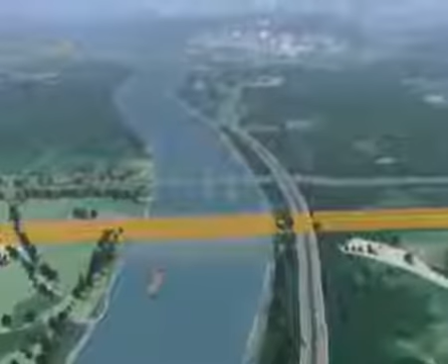For alluvial soils as well as for rocky conditions, HDD is the right method to install a prefabricated pipeline fast and cost-effective underneath obstacles.

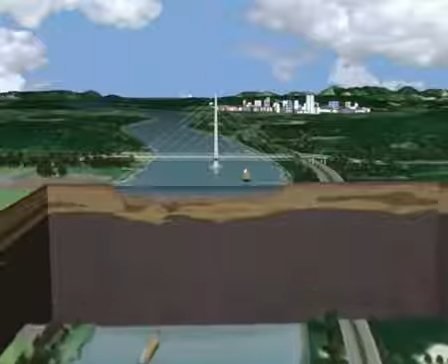The principal working method is easy to explain. From an entry point on one side of the crossing, a steerable drill bit is pushed through the ground to the exit point on the other side of the obstacle. The pilot bore is then enlarged in one or more reaming passes until the borehole reaches the desired diameter. In the final step, the prepared product pipe is pulled by the drill rig into the bentonite-filled hole and placed safely in the ground.

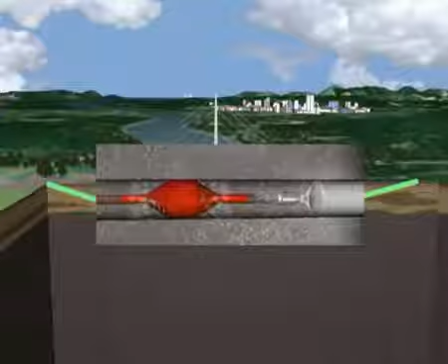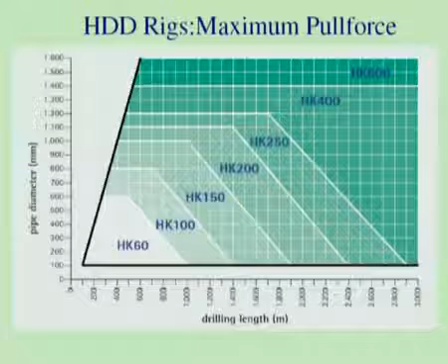The diagram shows the pipe diameter and lengths that can be pulled by the most popular rig sizes in suitable ground conditions. Four basic types of drill rigs are available: frame rig Series F, trailer rig Series T, crawler rig Series C, and modular rig Series M.

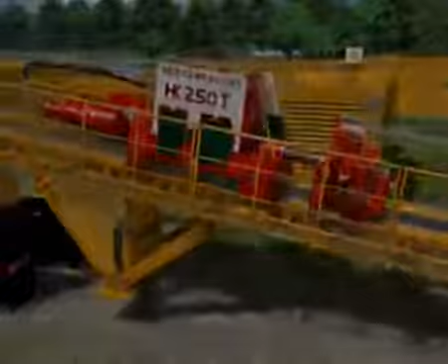The following computer animation shows the use of a 250-ton Herrenknecht trailer rig for a pipeline river crossing. The soil conditions in the example consist of typical alluvial soil as clay and sand.

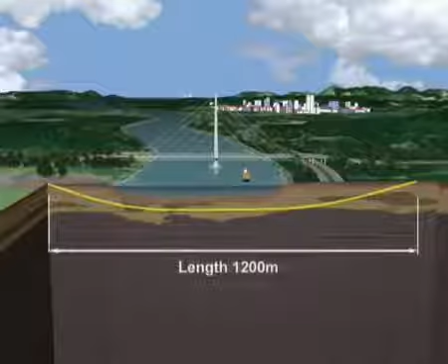The drilling alignment is shown schematically. The length is approximately 1,200 meters, with an entry angle of 14 degrees at the rig site and an exit angle of 10 degrees at the pipe site.

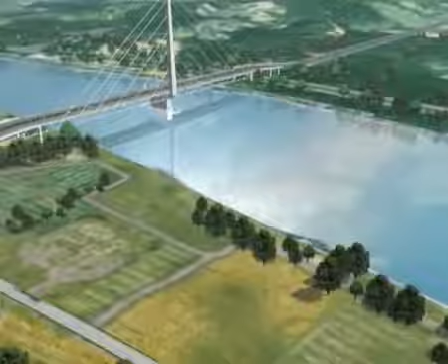On both sides of the river, a limited working area is prepared for the drilling equipment and the pipe works. On the rig site, a small entry pit with a depth of approximately 2 meters is installed. Nearby, a larger storage pit for the drilling suspension is constructed.

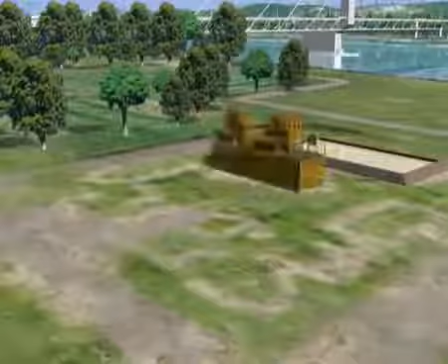Separation plants, a buffer tank, a mixing unit for bentonite, pump and power packs, and pipe skid complete the basic equipment on the rig site.

All equipment is delivered in standard containers and can be installed fast and easily. The control cabin is placed near the sheet pile wall, which is required to anchor the drill rig.

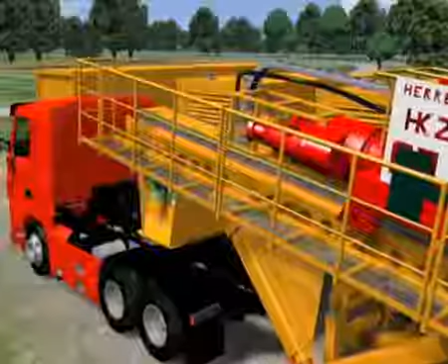For easy transport over long distances, trailer rigs are the ideal layout design. Herrenknecht's trailer-mounted drill rigs can be towed by any kind of truck with a standard kingpin and sufficient payload. The drill rig is lifted off the truck with crank-handle joist supports without needing additional hydraulic power. Then the truck can leave the site.

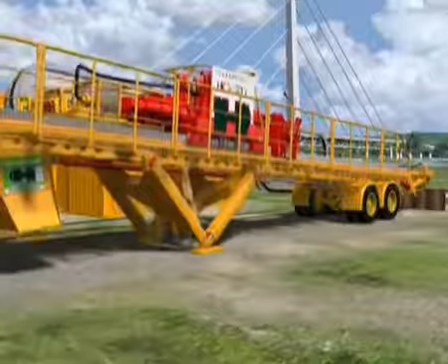With the hydraulic power supply from the power packs, the front supports are then extended and the axle unit is moved into its park position.

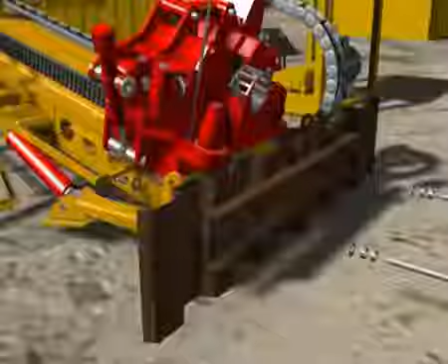The carriage and the breakout unit can then be moved into operational position. Both units are connected via a power chain to the hydraulic, electric and drilling fluid supply. Finally, the rig is anchored to the sheet pile wall and drilling operation can start.

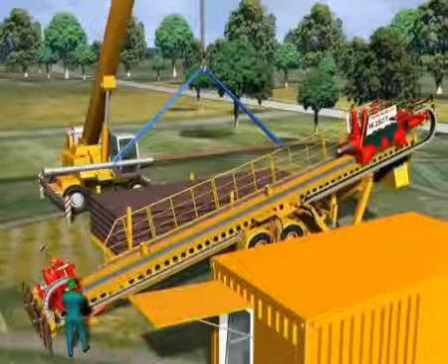The first pipe with the drill bit is positioned by the crane and connected with the carriage. Then it is pushed forward into the entry pit while rotating constantly.

One after another, the pipes are connected and pushed into the ground. The pipes have conical threads for easy make-up and break of connections.

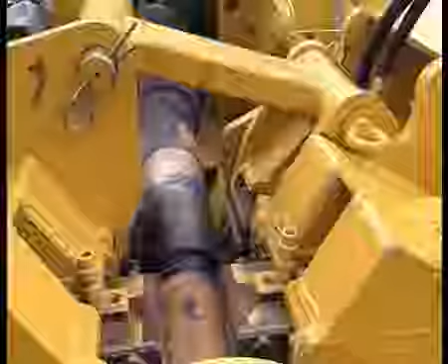If drilling straight, the drill bit rotates constantly at high revolution. The bentonite suspension is pumped through the drill string to the nozzles in the front of the drill bit, hydraulically cutting the soil in front.

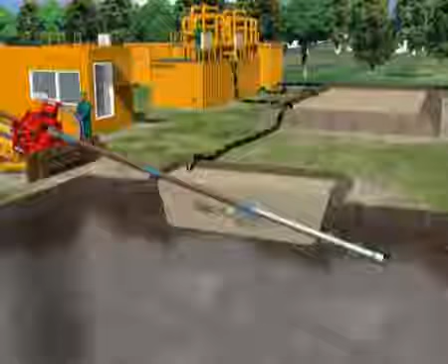There, the drilling mud mixes with the soil and flows back through the annulus between the drill pipe and borehole to the entry pit on the surface.

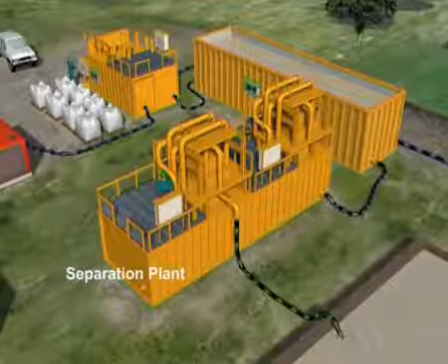From here, the bentonite cutting mixture is pumped to the separation plant. This unit separates the cuttings from the slurry, and the cleaned fluid is transferred to a buffer tank. Fresh water from the river is mixed with bentonite and added to the mud cycle.

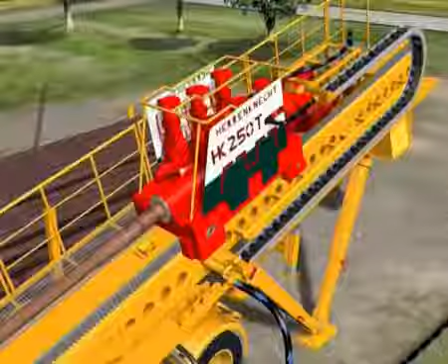Now the high-pressure pump takes over, pumping drilling fluid along the surface hoses to the carriage, down through the drill rods and back to the drill bit in the ground.

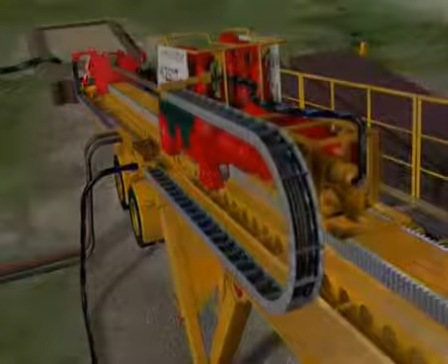Installed behind the drill bit is a so-called bent sub with approximately 1 to 2 degrees deflection. When the rotation of the drill string stops, the bent sub faces in a certain direction, adjustable from 0 to 360 degrees. If pushed further, the drill bit will follow this direction and create a curved alignment in the ground as per the project design.

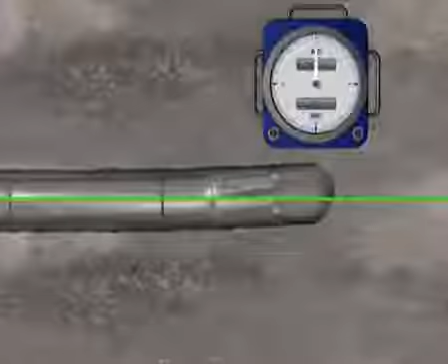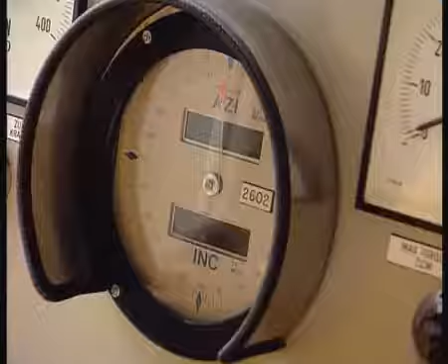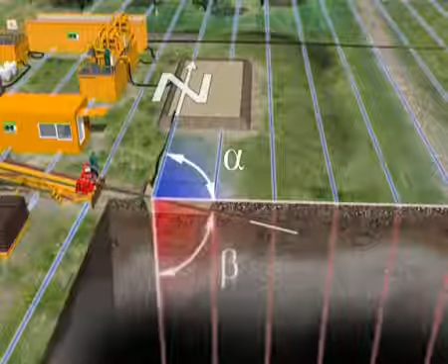The inclinometer in the driller's console shows the working direction of the drill bit in the ground, the so-called tool face. This information, together with the actual azimuth and inclination, is generated by a steering tool placed within the first drill rod, located directly behind the drill bit. The references for this information are the Earth's magnetic field for azimuth and the Earth's gravitational field for inclination. Together with the drilled length, a computer system can calculate the actual position of the drill bit in the ground, enabling the driller to carry out necessary corrections of the alignment by adjusting the tool face of the drill bit prior to further advancement.

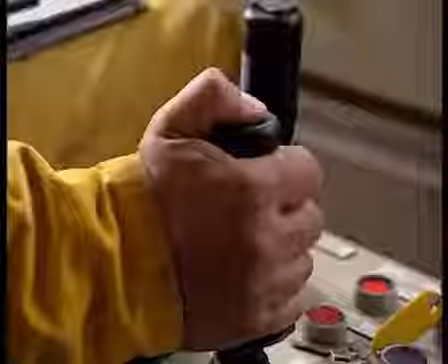The driller as well as the surveyor are located inside the air-conditioned control cabin. The large windows allow an excellent overview of the drill rig and job site.

When the drill bit punches out on the other side of the obstacle at its predetermined position, the pilot hole is completed and the drill bit, as well as the anti-magnetic drill pipe with the steering tool, is disconnected from the drill string. A small exit pit and a suitable storage pit for drilling mud, including a recycling unit, is installed on the pipe site working area in order to process the returning drilling fluid on this side of the obstacle.

In order to enlarge the pilot hole to a larger diameter, a reamer is connected with the drill string and then pulled back through the borehole by the drill rig. Depending on the soil conditions, different types of reamers, like barrel reamers, fly cutters and hole openers, are available to achieve optimum drilling progress. All reamers are equipped with nozzles and cutting tools in order to attack the ground both hydraulically and mechanically. Depending on the desired final diameter of the borehole, several reaming passes can be necessary.

During the reaming process, the drilling fluid with the cuttings returns to both sides of the crossing.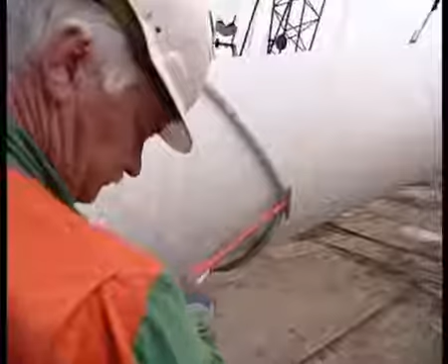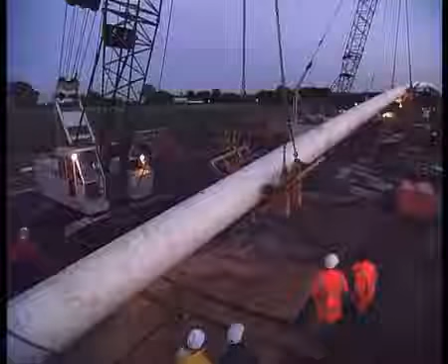Meanwhile, the prefabricated and tested product pipe is positioned on pipe rollers behind the exit point on pipe site. In order to match the exit angle, the first part of the product pipe is lifted into a suitable catenary or overbend to avoid buckling when pulled into the borehole.

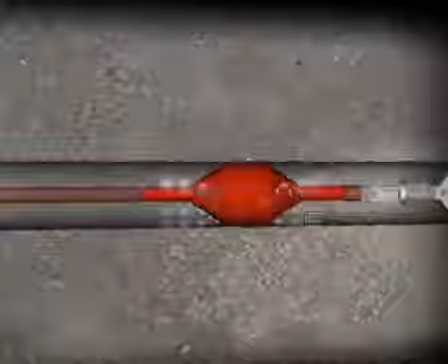The pull head of the product pipe is connected via a so-called pullback assembly, consisting of swivel, U-joint or shackles, with a reamer and the drill string. Consequently, the drill rig on rig site starts pulling back the product pipe into the borehole by removing drill rod after drill rod. Finally, the product pipe reaches its designed position in the ground.

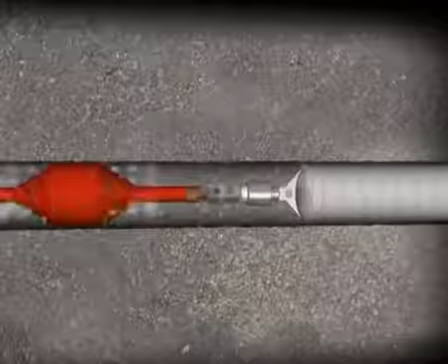The trenchless HDD technology is an environmentally friendly, fast and cost-effective method to install pipelines under obstacles. In connection with state-of-the-art equipment from Herrenknecht Drilling, lengths of up to 3,000 meters and diameters up to 1.6 meters can be achieved.